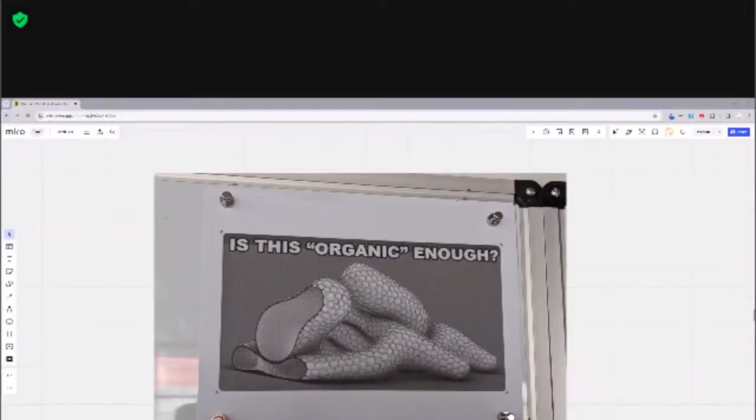The title of this talk, "Is This Organic Enough?" is a phrase I borrowed from a Grasshopper tutorial by Gediminas Kirdeikis, which I've no doubt mispronounced. But I actually printed out, let me share my screen real quick. Here we are. So I actually printed this out and posted it on my dry erase board at work. It's a funny, subtle jab at the pursuit of the organic for the sake of organic. In architecture, the ego of who can make the most globular blob. But it's also a challenge both in design and fabrication.

Imagining organic forms is one thing. We see them all the time in nature. So we don't have to think too hard. We can just look up at the sky and see clouds. Visualizing them, be it by sketching or 3D modeling, is another level, slightly more challenging. But the physical realization of these intentional, digitally planned organic forms at any scale beyond 3D printing is often an incredible feat.

That challenge in design and fabrication has pulled me through the years from an entirely analog existence to my current digital obsession. I began my career as a carpenter in the custom door and cabinetry industry, which is a little boring. And initially, I got by just fine with high school level geometry and doodling on scraps of wood. In traditional fabrication, right angles are typically the right angle and straight lines are great lines. It makes sense that we live in boxes and get buried in boxes because those are efficient forms, potentially boring forms, but efficient. You can make them on any table saw or miter saw, etc.

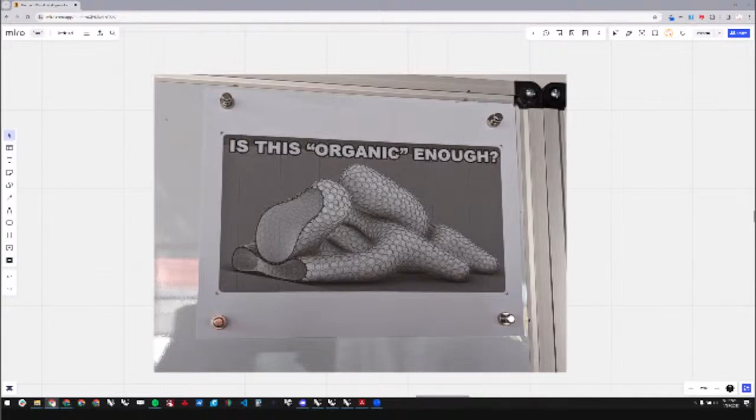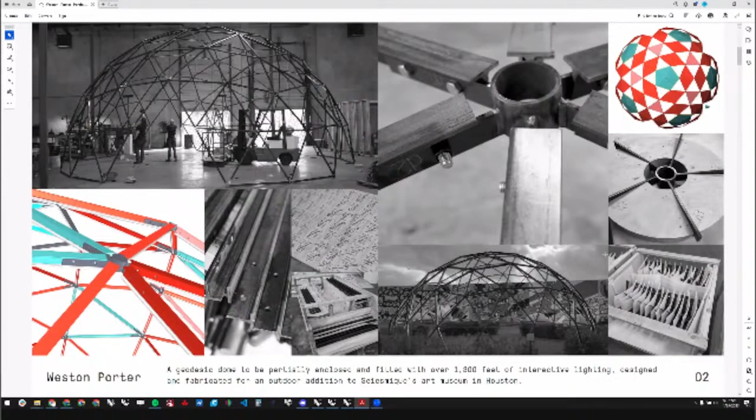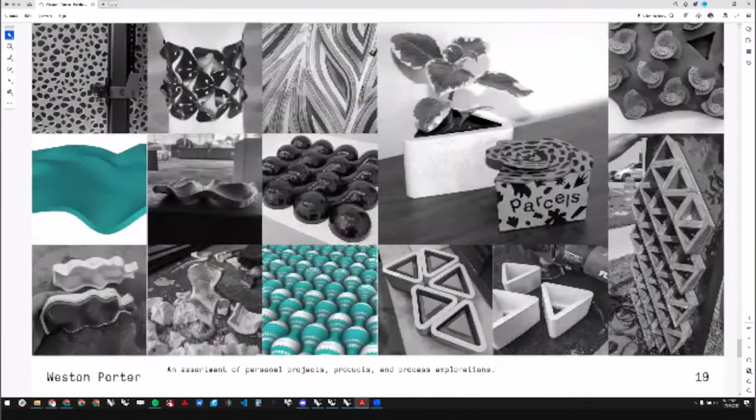And some of these projects I'll be going into detail into the guts, the files of these, but I can scroll through a few. The fun domes are at the top, but a lot of scenic things, museum experience, anything and everything that I have been able to create over the years. Let me scroll back up to something relevant.

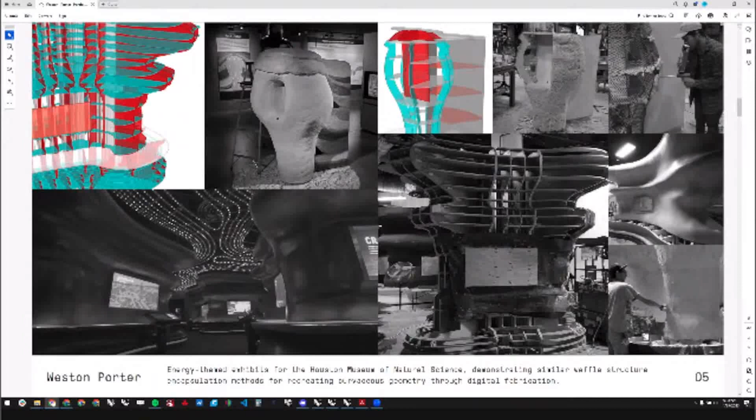Right. So making unusual shapes like these, surfaces, structures, necessitates continuously innovating with traditional fabrication, exploring uncommon materials, learning new software, programming, and embracing robotics. After a career in fabrication, the yearning for more organic projects led me to college for formal design education and ultimately to the Master of Parametric Design at Barcelona Tech, the MPDA, where I specialized in Grasshopper. Again, the tool I'll be demonstrating for you today.

I think I have a slide in here somewhere from some of these projects. A couple of pavilions that we did. Yeah, this program was primarily about learning Grasshopper, but we did it in the very fascinating way of examining domes and pavilions.

One second, please. One second, technical difficulty. Okay, all right, where was I?

Right, so before I get into the technical side of things, let me ask, what is organic anyways? Formally speaking, it's probably in the eye of the beholder, but generally I'd argue that it evolves with technology. I have accompanying photos for these. So this is a book from 1941 from the MoMA. It has an interesting description of organic design.

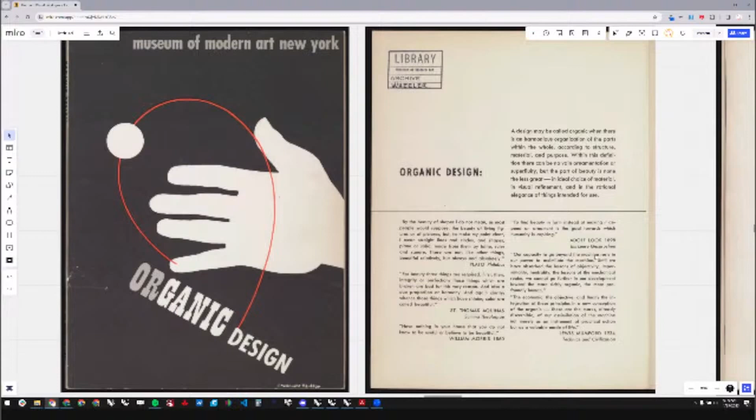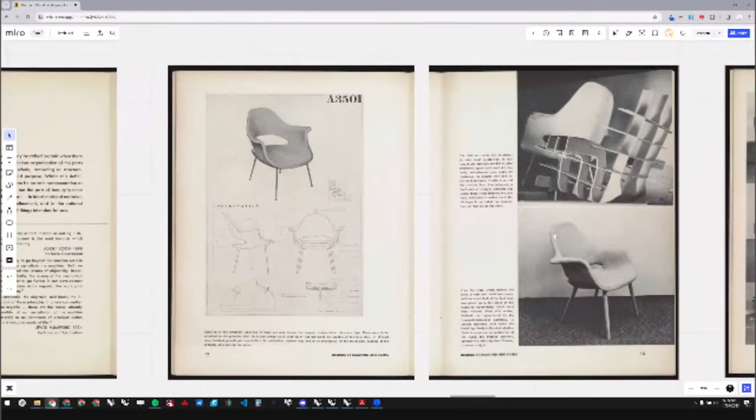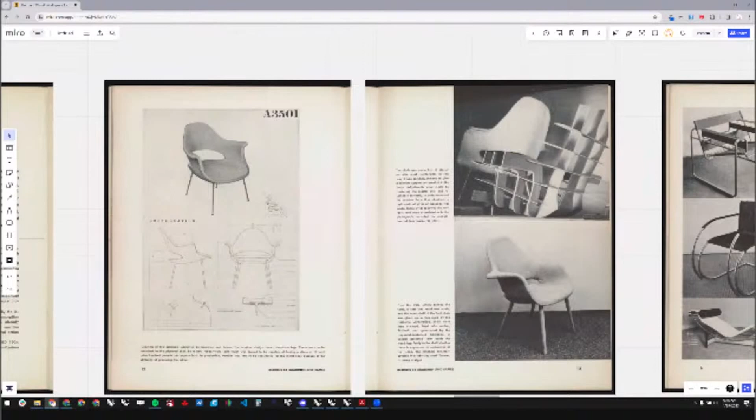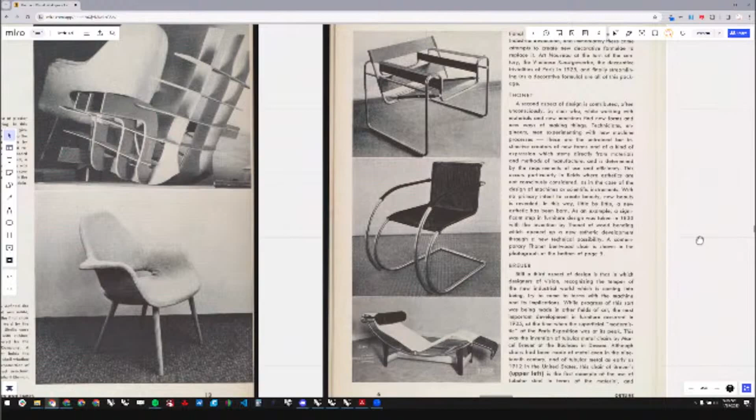And in this time, pretty much any deviation from straight lines and right angles was considered organic. The double curvature of the Eames chair, which was an innovation in steam bending perpetuated by the wartime industry, blew people's minds. This little bit of double curvature right here. Likewise, new industrial tube bending technology gave birth to Marcel Breuer and Mies van der Rohe's chairs, precedents in furniture design that continue today.

The point that I'm trying to make is technical capability often drives creativity. It either limits creativity or it enables creativity, which is the crux of design. And today, with digital fabrication, rapid prototyping, batch manufacturing, and incredible new materials, that is a high bar for any creative to well and truly exploit. Computational design is part of that answer.

It's the peanut butter to digital fabrication's jelly, the yin to its yang, and through both you can push the limits of what can be digitally conceptualized and then what can actually be physically created. You need a plan for that though, and how to realize that. I'm going to go through a few of mine today.

For my personal ideology as to what organic is, I'm there with the mid-century furniture. Working in organic on a large scale requires quite the investment. Typically, I'll take whatever double curvature or undulation I can get, anything in the pursuit of asymmetry. Asymmetry is often an expensive luxury, but I will get into that momentarily.

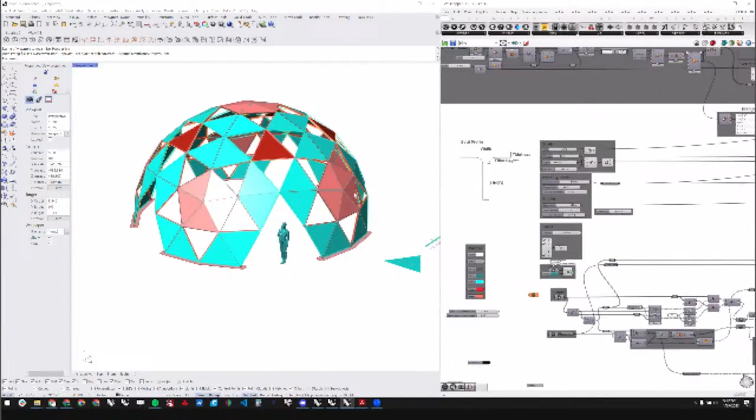So, talking about these organic shapes, I'm going to focus on domes. Let me begin with a geodesic dome. So geodesic domes, while they are faceted, are examples of double curvature, of discrete translations of spheres. Let me turn off a few things here. So let me get you a little accustomed with the interface here.

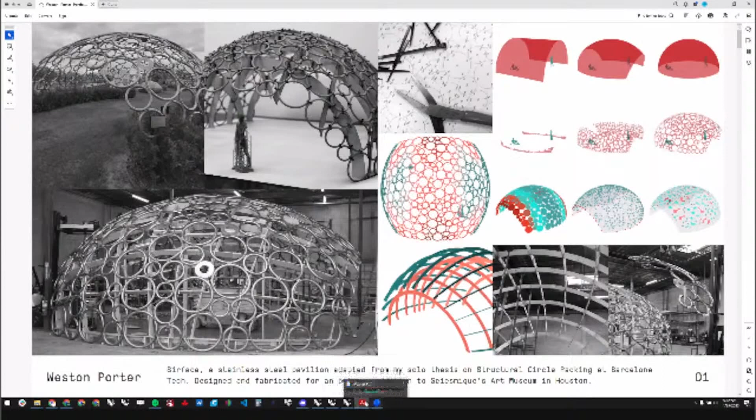So this is Grasshopper, a plugin for Rhino, Rhino being a 3D modeling software. And for the case of these initial three pavilions, curved domes, this is what I'll be using. And it's somewhat of a flex because in each one of these three files, there was no base geometry involved. So we're generating the shape and then we're generating the parts and plans off of that shape.

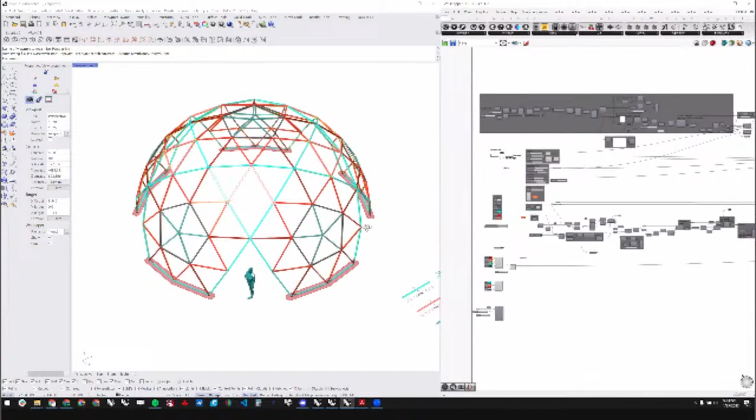So I wanted to talk about symmetry and asymmetry first, and the geodesic dome is a perfect place to begin with that. So here in the beginning, we're focused on the form finding. So that would be the size of the dome and the frequency, being the number of these triangular panels that break it up.

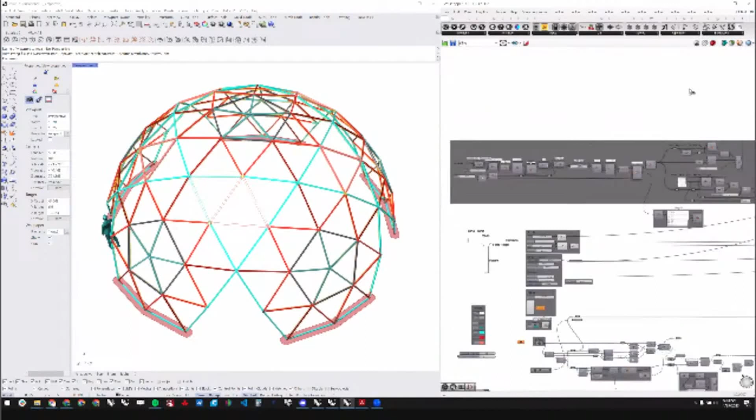Within this geometry, you have the freedom to change the size of this, increase the size or shrink it, or add more frequency. And the rest of the script adapts to build that and ends up spitting out everything you need to actually physically create it.

The interesting thing about the geodesic domes is there is a lot of symmetry. There's a lot of symmetry here, so you have a lot of repetitive parts. So if I scroll out here, go into overhead mode, you see these are the unique struts.

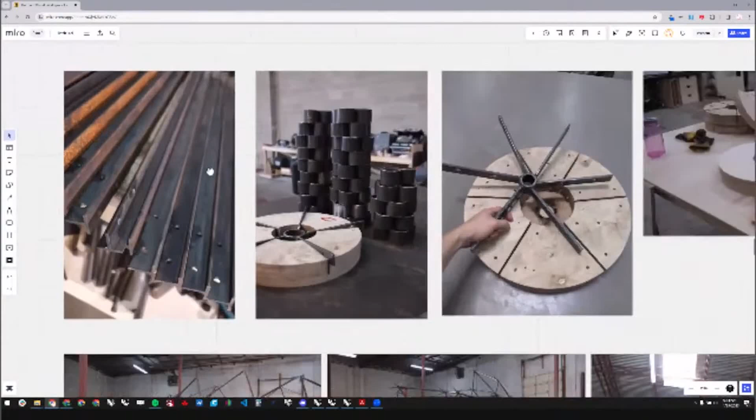In the case of this geodesic dome, rather than buying a dome kit like a reasonable person would be doing, we built it from scratch. The material on this was very structural. It was this steel T-bar channel, and these were the unique links, here labeled different colors as S0, S1, S2, and so on. And then next to it, the dimensions.

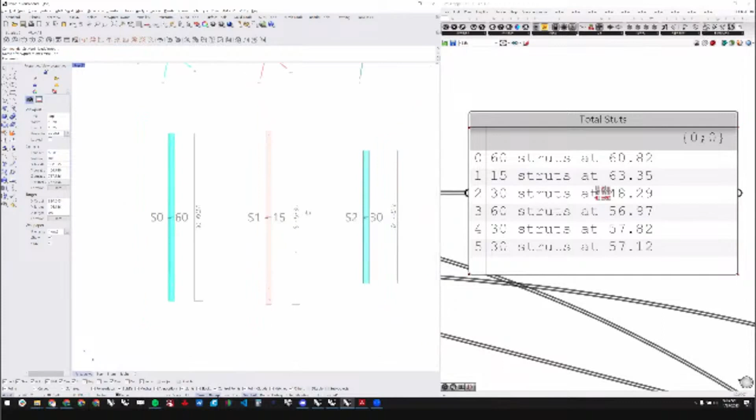I'm sorry, everything here is in inches. But we do have some decimal places here. So 63.35 is a difficult thing to give someone with a tape measure. 56.97, you can round down, but with structures like these, any small deviations or lack of tolerance can cascade and throw everything all out of whack.

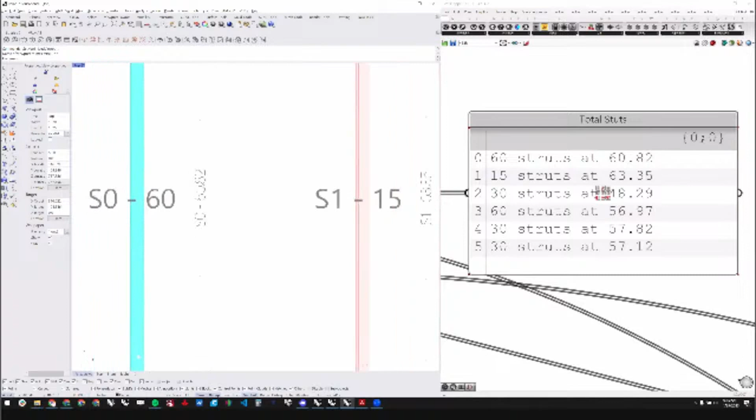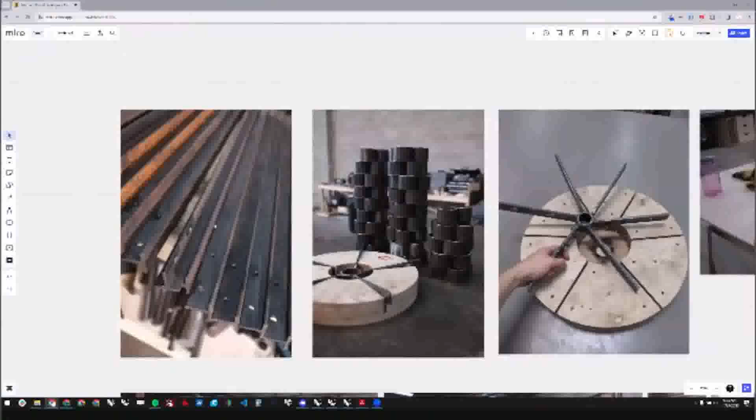And this is a discussion about design for fabrication. So let me start there. These pieces you see, these 2D curves, these are CNC ready files, and these are labels for these files. So in this case, we CNC routed out these long sticks to test the fit on the pieces as they come off of the metal bandsaw.

Coming upwards, we also have 1, 2, 3, 4, 5, 6, 7, 8, 9 different hubs. Each one of these nodes has to be a very specific angle. Luckily, we didn't have to make too many of them, but being able to create these and retain this accuracy is, again, really important for tolerances.

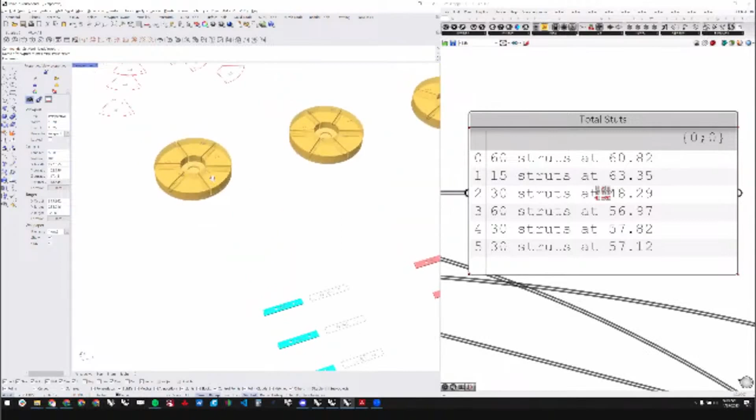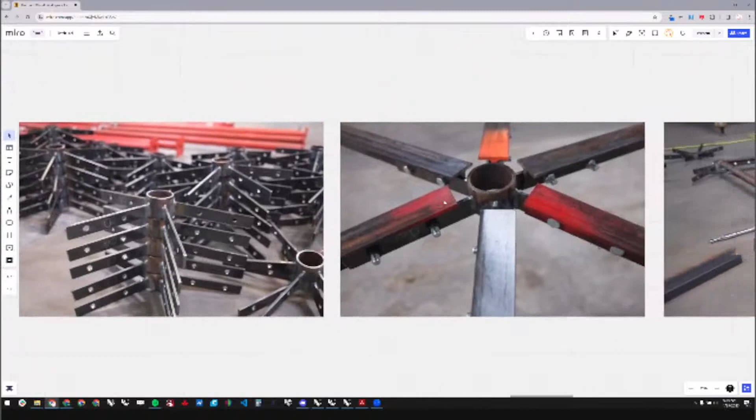In this script, the hubs are being created as 3D models, but then we're breaking apart the individual pieces and labeling them for the different fins and flanges for the hubs, as well as these CNC routed jigs, which you can see in this photo right here, have some laser cut inserts to line everything up to be welded at the exact dimensions needed to bolt together with the T-bar. So in this case, the script also includes the CNC routed files for these with pockets and labels and the laser cut pieces.

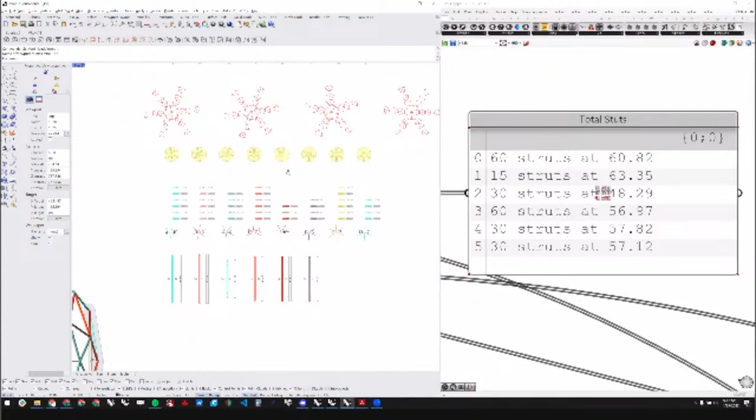Now, this is a pretty easy system. We don't have that many parts. We could basically just look at the map of these pieces, color coordinate it to the pieces and build this. Honestly, geodesic domes are straightforward enough that you wouldn't necessarily need any of this at all. You could just take the lengths and do a little math and figure it out yourself. But the way I built this script is that I built it for asymmetry.

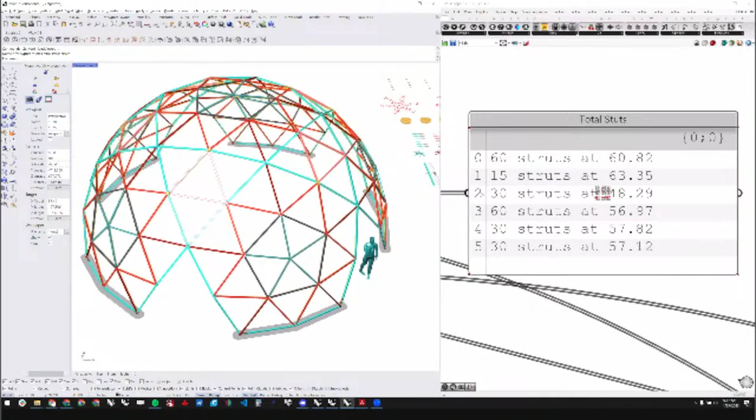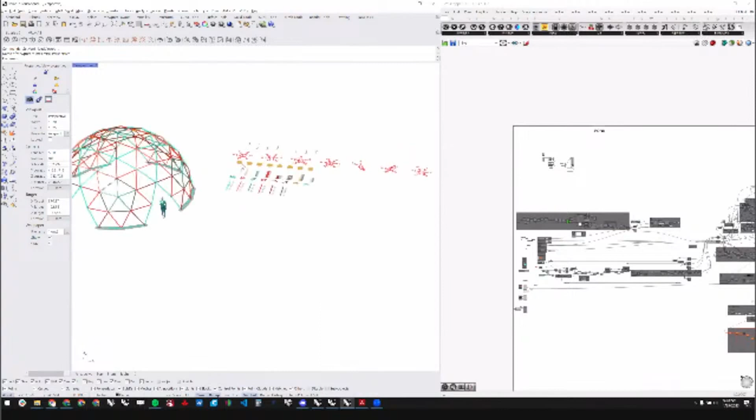So if I were to take this initial dome geometry and skew it, squish it, scale it unproportionally, if I were to take some of these vertexes and push and pull them in different ways, then after my computer thinks for a long time and potentially crashes, it would recompute everything here. So instead of these 7 or 8 different jigs, this little yellow line would go off into near infinity. And at that point, it's a risk versus reward. This is where asymmetry gets really expensive.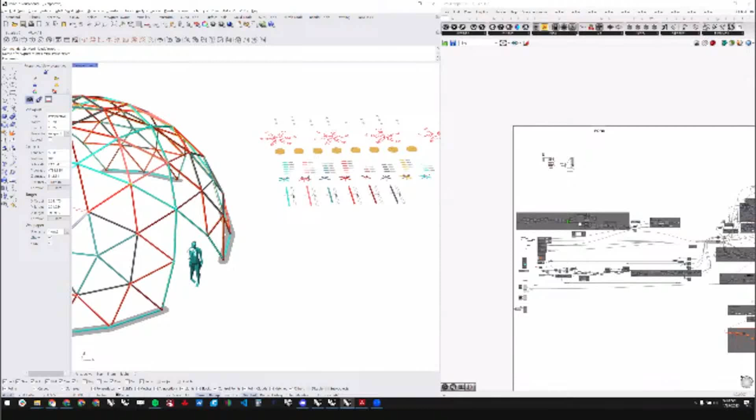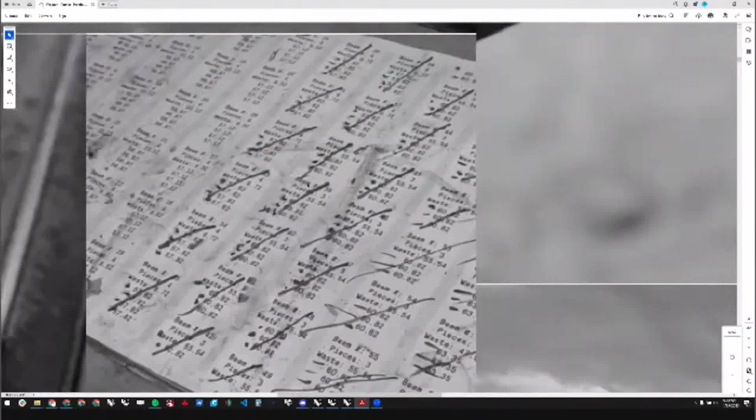You can make things that are less symmetrical, but then you're looking at potentially each and every one of the parts being entirely unique. But that's not necessarily a problem. That's a problem of the organic in general. As long as you have a system in place for managing this, then it's not an insurmountable task. A part of what this script does is gives you the cut list for linear nesting.

So, if you have someone at a station just working a metal bandsaw all day on these 20-foot long lengths, then they would have a map of how long to measure each one and cut it. They would have these story sticks, the plywood sticks, to be able to measure that. The hole placement is standardized, and someone could potentially just assemble these jigs all day long, gather up the plasma cut engraved pieces, and in this regard, you could build pretty much any shape you want, within reason. Torsion and twisting are another issue, but I can reference that on another piece.

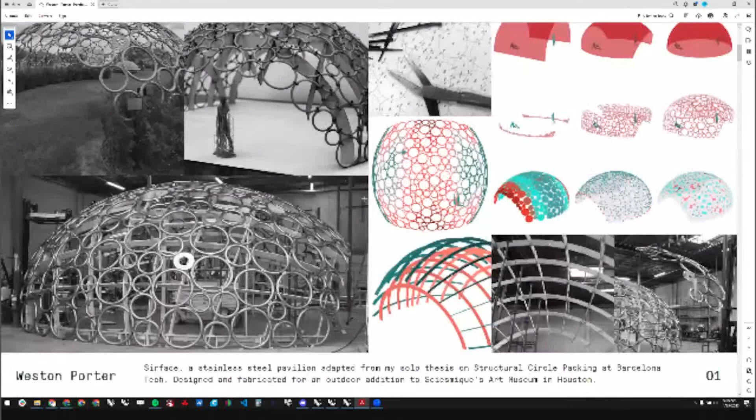So the next one I'd like to jump into is this circle packing dome, which gets slightly more asymmetrical. So in this dome, to the photos here real quick.

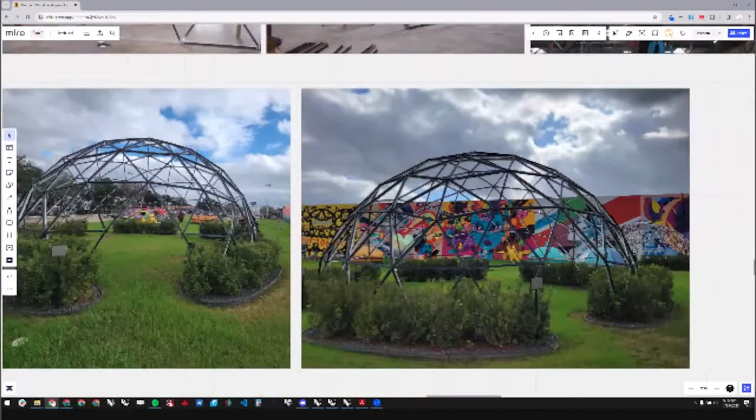I'll walk you through the process a little bit. All right, so here is the geodesic. Everything came together really well, as you expect with the geodesic math. And this thing was ridiculously strong, stronger than it needed to be. This was the initial installation outside, but it'll eventually be enclosed.

So the circle dome surface, as I like to call it, was my thesis project, my solo thesis project at MPDA. And I had the luck of being able to build it at the same time, or shortly after I graduated. This is the aforementioned geodesic in the back here.

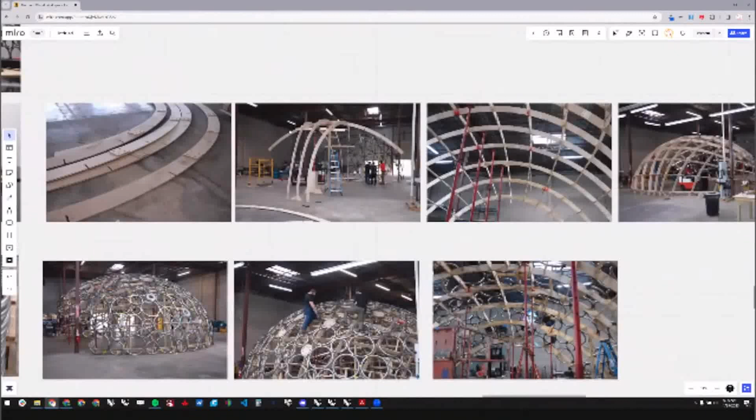And I was doing that project for a sculpture park in Houston, and I was kind of able to upsell a 2-for-1 dome special. This one being a lot more theoretical and experimental and nerve-wracking to create, but it turned out all right. So before I jump into the script, I'll briefly outline the direction here.

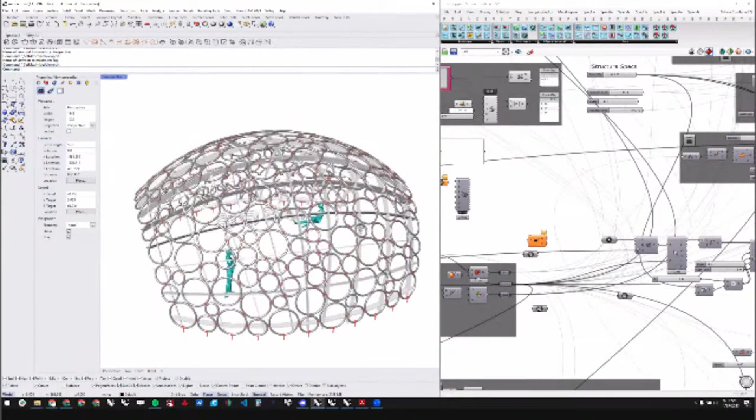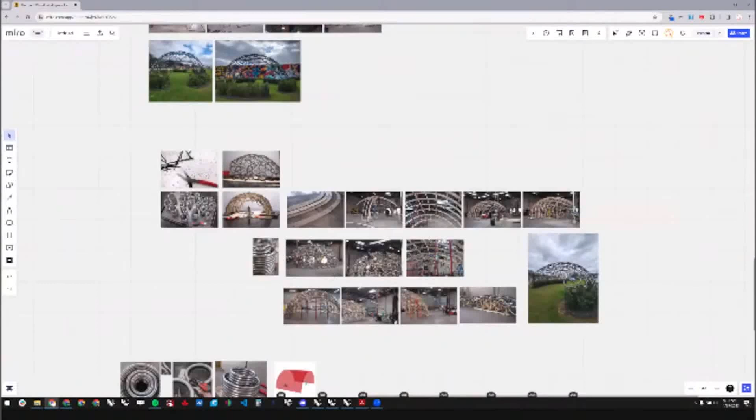So the idea of the dome is circle packing, but circle packing in a structural way. Circle packing is something that you can think of in terms of soap bubbles in the sink, kind of like jostling back and forth for the right position. And that's largely how this was generated. I think I'll take a second to load some of these animations.

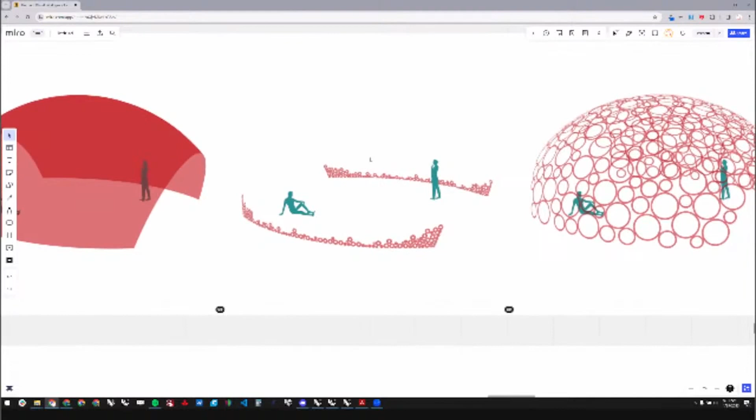But it was the idea of generating the surface, capturing the surface somewhere between a plane and a dome, generating the circle pattern somewhat randomly onto this dome. I'll have to come back when these are loaded a little bit better. And then optimizing the pattern to be the most structural.

The difficulty here was that we're using these steel rings, and the diameters of these steel rings. I've actually got one here, one of the smallest ones, signed by the crew that helped me put it together. But the issue is that each one of these rings couldn't be its own custom size. It needed to be a specific diameter. In this case, I used 3 different diameters.

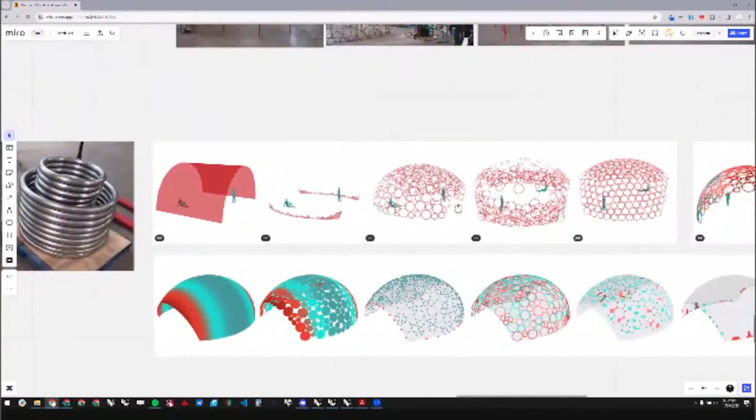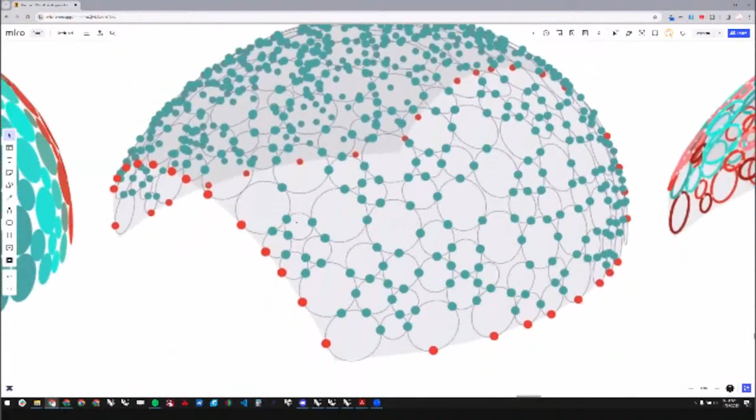So the computational method had to do with how we're going to fill this space in a structural way to make sure that all of these rings are connecting to their tangential neighbors with enough pieces. Typically, these all have 4 connections each, and considering the outside edge.

In this system, I got to explore several different ways of generating these, but the most effective way was through just generating these forms, these patterns randomly, and then coming back and examining what was right about them, what was wrong about them, and then regenerating them.

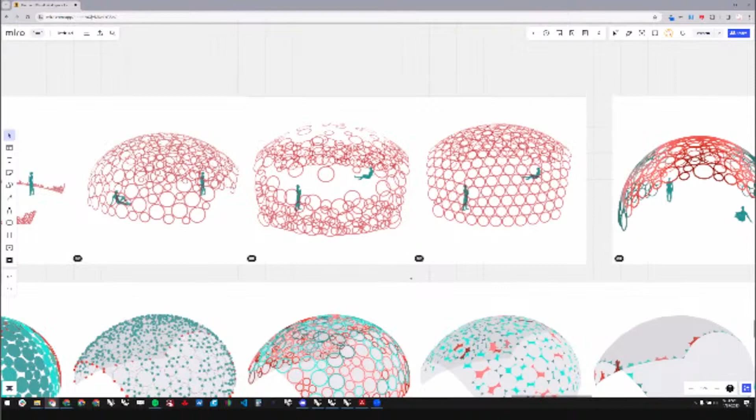In Grasshopper, the specific tools for this were Kangaroo, which is a physics simulation generator, and Octopus, which is a multi-objective solver. It allows you to create a circular process of generation, optimization, and regeneration. Some of the example metrics that I use for this are measuring the surface,

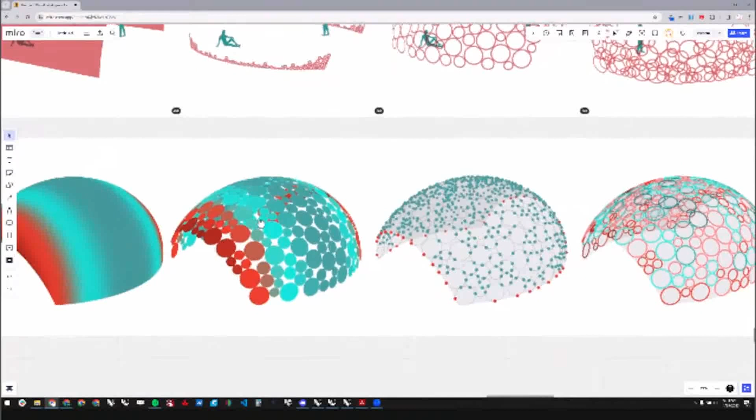curvature, visualizing the circles of any given pattern for the planar nature of these rings over curvature. So in areas like this in the turquoise, it's easier to maintain the curvature. In other areas like this in the red, it gets a little bit harder because you're starting to deal with these flat planes.

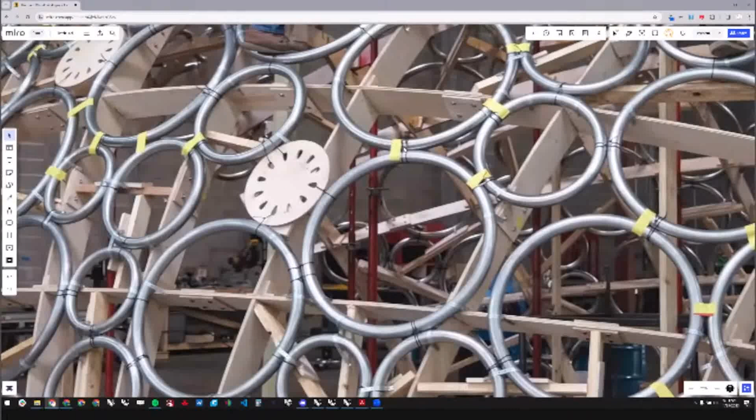Again, measuring the quantity of these tangential connections, the way that the ring dome was temporarily anchored, but then ultimately welded together. You can see these little butterfly connections here. And... lost myself.

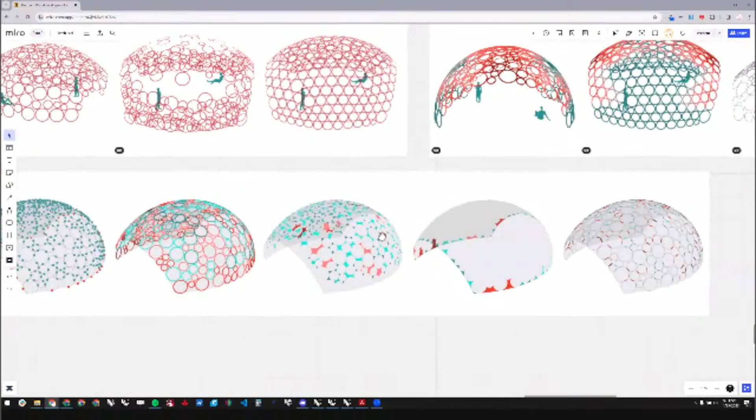And trying to predict for aesthetic issues. Unsightly gaps in areas may not be a structural issue, but might be an aesthetic issue along the edge as well. And then the closeness of these rings, which helps to estimate how difficult some connections would be.

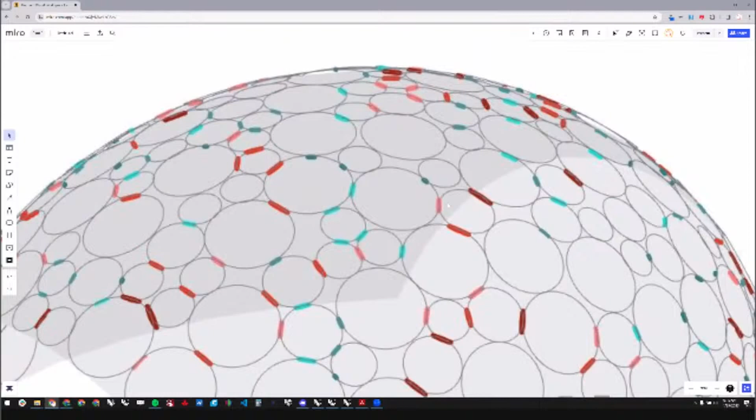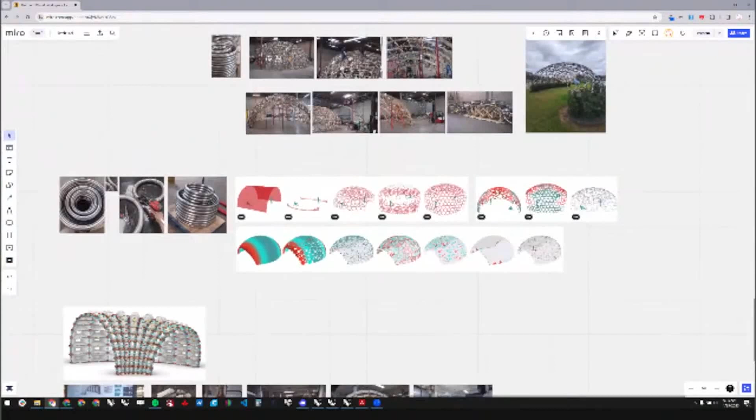Ideally, everything should maybe almost touch with these rings, but definitely not overlap, because then this ring is jostling another ring out of its place, and very quickly that will cascade around and cause a lot of difficulty. So by optimizing how these were generated, I was able to create a map, essentially, of which rings are being used where and their angles to each other.

Initially, I 3D printed these rings and then created a model off of them. The first model I created was very lumpy, as you can see, and I determined that I would need to have an internal substructure, temporary plywood substructure, to make that happen. So walking through that process a little bit, I'll speed up a little bit because I'm behind on time,

but we created the simple radial waffle structure to support everything, anchored and reinforced that, and then according to the original map, started laying out the different rings, temporarily just zip tying them, connecting them together, and eventually welding each of these together. In some cases, I ran short of rings and we had to factor in some plasma cut pieces, but overall, the map held very true until the very top here.

Here's the finished dome in the warehouse, and we left seams in very strategic places so the different panels could be pulled apart, stored, and then ultimately reassembled on site.

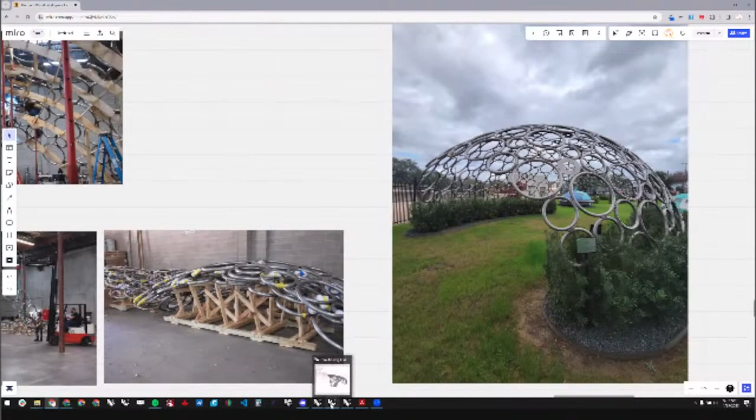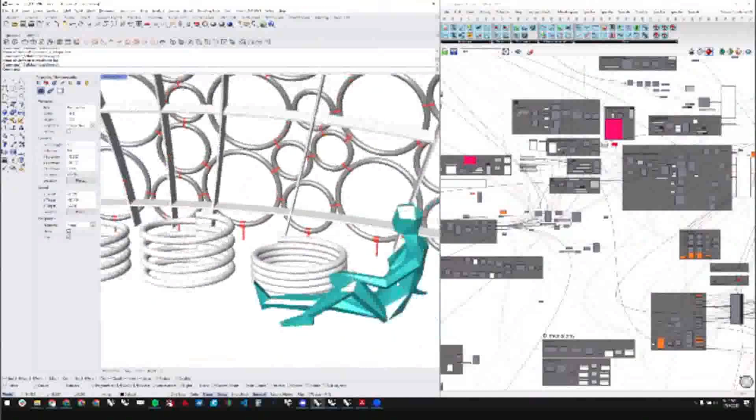So again, on the idea of adaptation, here's the model for the ring dome, one of three files. This was the process by which the rings were rolled into stacks, then cut, bent back together, and welded in place.

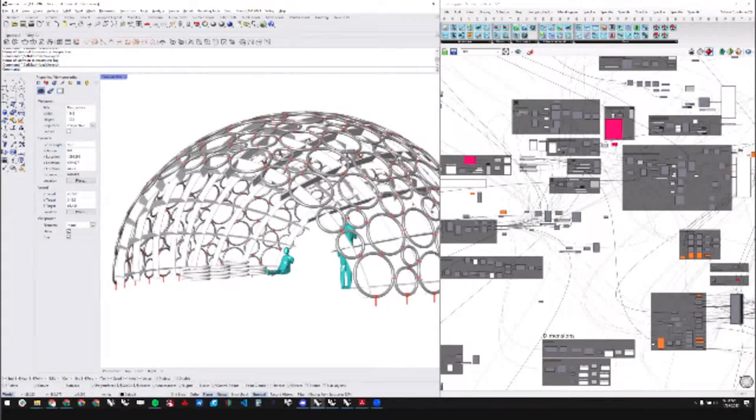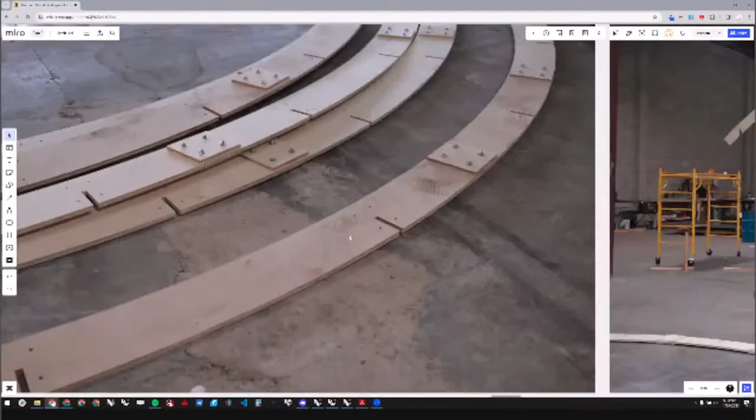But again, just like the geodesic dome, it's the idea of adaptability and using as many like parts as possible. The radial waffle structure, each one of those pieces was definitely unique. By the way, plywood at this length becomes like noodles, essentially, but it was manageable. Each piece was generated and labeled. Everything slid together appropriately, with notches generated at the right angles to allow everything to come together.

I chose this shape somewhat cautiously because it was more dome-like, and the more dome-like you are, the more confidence you can have that it won't fall over on you. Egg shapes, hemispheres, domes are just naturally very strong forms.

But the repetition of pieces, namely these circles, and the plan for how they are brought together and communicated to those assembling it, was a key feature for capturing this organic double curvature and slight asymmetry in the way that the dome spreads open.

So that was kind of a precursor to coming to the third - I wouldn't call this a dome, but perhaps a pavilion we have here, which is a prototype I made for a company called Volvax in New York. This represents pushing the idea of asymmetry a little bit further.

This was based on conical research, something that one of my professors at MPDA, Xavier Teller, specialized in, and myself and Danny, another one of my fellow alum, really threw ourselves into. I essentially had both of their assistance helping build this, so I don't want to take all the credit.

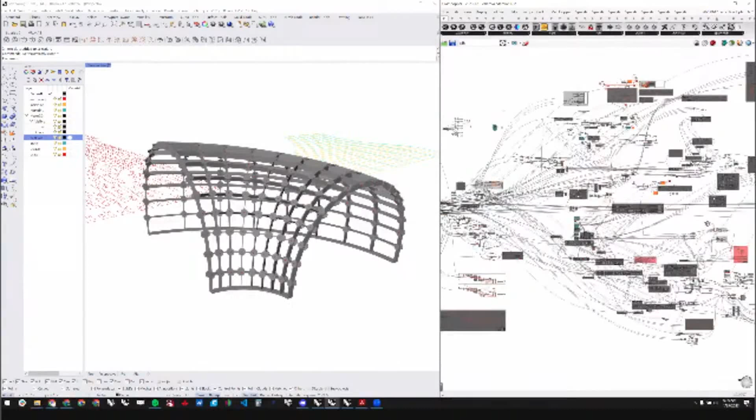But the key part with this piece is really the data management. Once you have something organic and potentially asymmetrical, every single piece is unique, and it can be difficult to manage all of those. This script here is about maybe 5,000 components. It's hard to show it all - it looks like a mess, just like any script this size could. But there are some unique features I just wanted to demonstrate, overall discussing these concepts and how they can make making organic things a little easier.

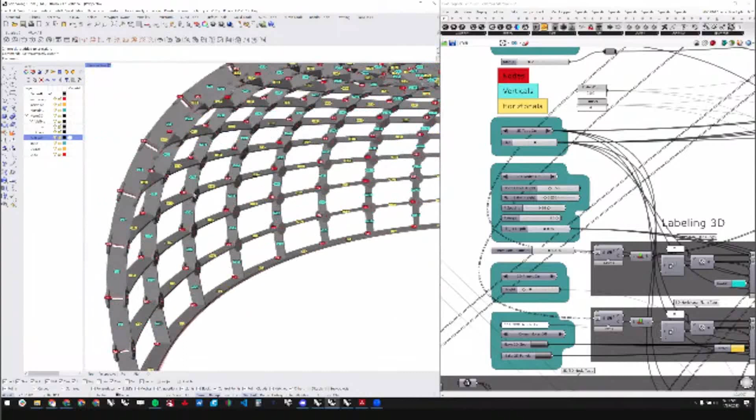First off, I would say part labeling is foremost, so I'm going to turn these 3D tags on. With every single piece on the structure being entirely unique, it was very important to give each one its own personal label. So this node right here is DR, this vertical strut is V71, this one is H147. And I have the visual map here of how everything comes together.

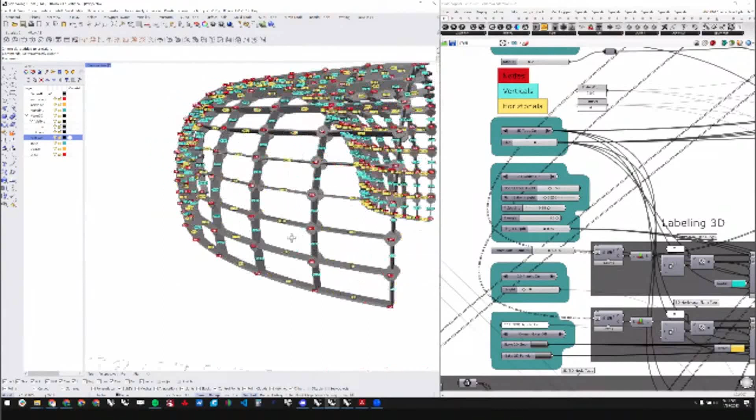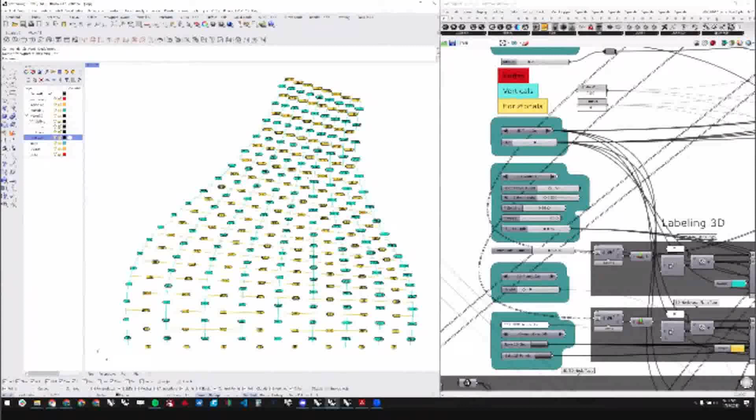Additionally, I have the flattened out view of what this shape would look like, again with all of the horizontals labeled. I have the nodes turned off here as well, but you would see those too. I did design this in a way to be a little more intuitive for the assembly. That's the second large thing with working with unique parts like these - how to label them and then how to bring them together.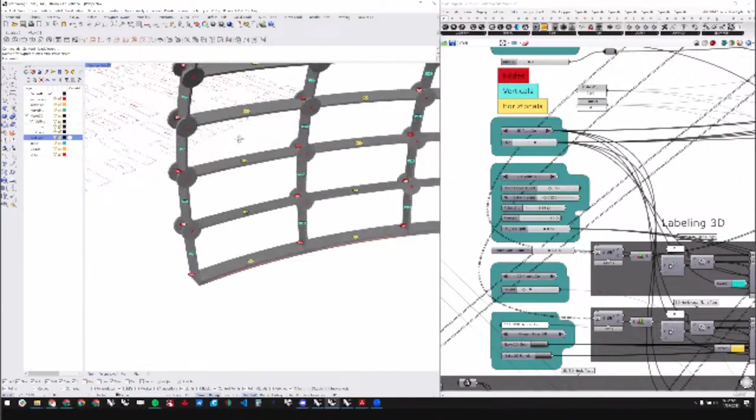It's the parts and the plans that bring it together, so there is a little bit of a rhyme and reason for this. The nodes start with AA, AB, AC, BA, BB, BC, and then you have horizontal 1, 2, 3, 4, and vertical 0, 1, 2, 3, 4. So if you did start on the corner of this piece, you could work your way all the way around, over this arc, just following this map.

These labels are translated to the parts as they are in 3D space, and then brought down to the 2D plane with the appropriate notches and with all of the labels. So the label of the piece itself in the middle, and then which one of the nodes to the left or right that it connected to. Likewise with the nodes, the name of the node here, and then the name of the connection that it links into nearby.

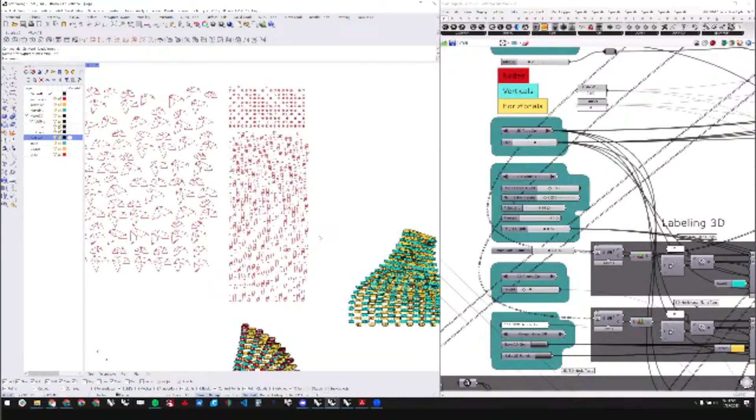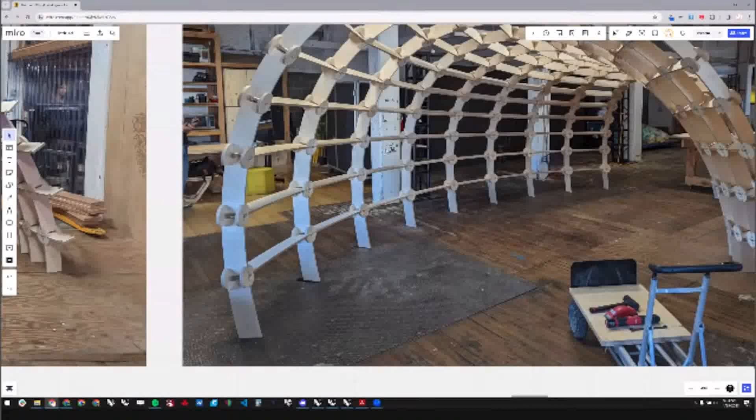This brings me to the third issue with dealing with this many pieces - it can ultimately become a puzzle. This structure was relatively small, but it was a prototype for what could be a much larger, much longer, much wider piece, or even a smaller piece but with smaller quads, so it was heavier and more structural. But if you end up just cutting all these pieces, then you suddenly have a puzzle to deal with.

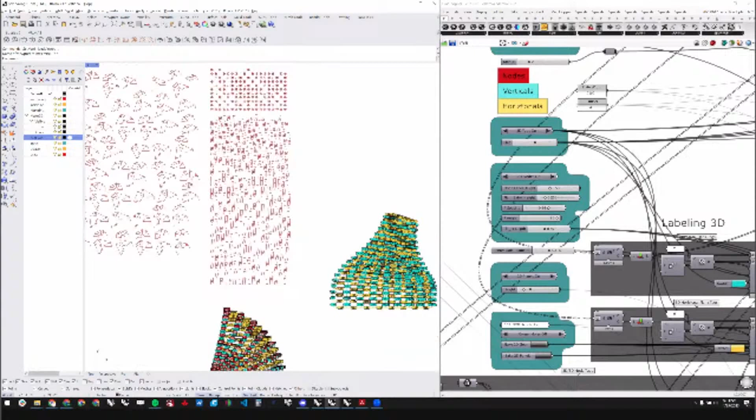And say you miscut one of these pieces, or you lost one of these pieces, or it's damaged on the CNC router, you would also have a puzzle to be able to go through and find the exact part you needed. So managing the order in which these are cut, the order in which they're nested on sheets, and the way in which you can find what you specifically need is also an important thing.

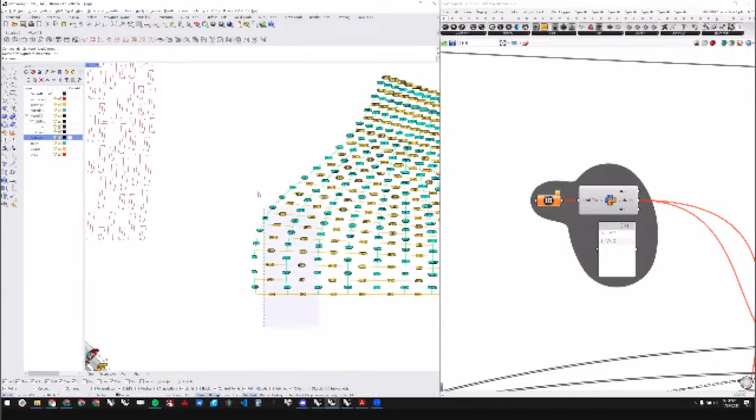That is something I addressed here with a node finder. So the map here, if I wanted to pick an individual piece, I can set it in here, and then it will show me exactly where it is. Likewise, I could grab a whole section and drop them there. Let me clear this off real quick.

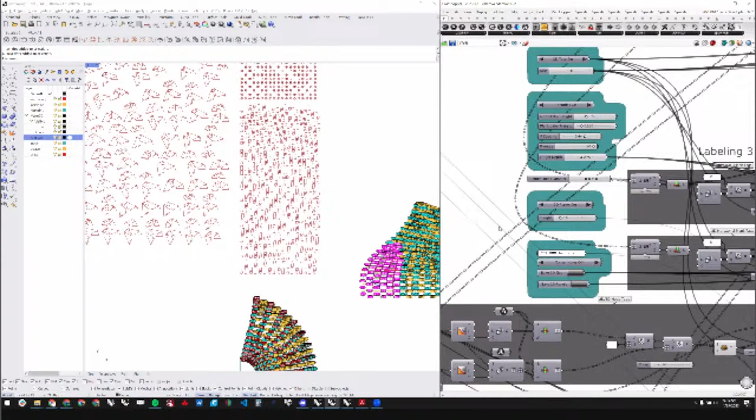This helps manage the data, and it's also helpful to use the software to prepare for the actual digital fabrication, which is the one thing I haven't really gotten into as much, focusing on the digital side, but it's through digital fabrication that all these structures are possible. And it can be tedious, again, with this many pieces if you don't have a plan for that.

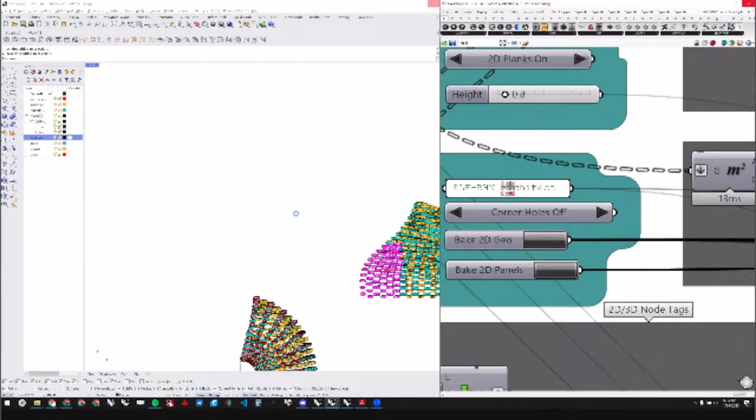So if I turn this off and bake all these pieces, it'll take a moment. If I bake all these pieces, then everything is in its specific layer for how it's going to be cut, and the labels are included, likewise for these.

There are ways in which CNC CAM software, the software that translates the parts into files for cutting, can be... it can be tedious if you don't properly communicate that, and it's even more tedious if you have to go through and click on every single piece within that software.

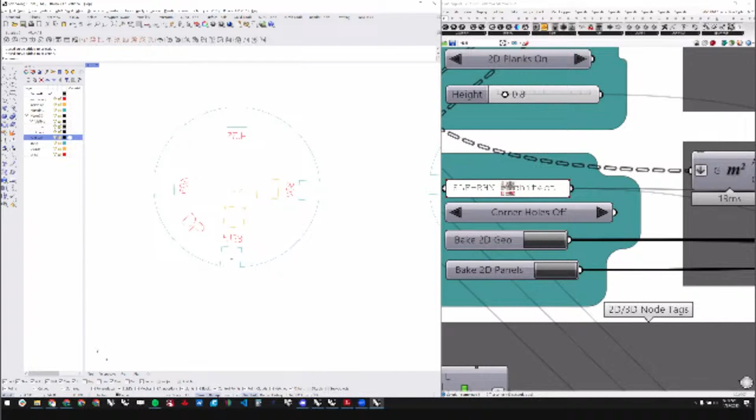So being able to break things out and recognize them as internal holes, that don't necessarily need any tabs to hold the piece down, or external pieces that do need little tabs around the edges. When and where the inside of these corners can get the little dog bone, with a rounded bit, you can't always get right into a corner. These are really important things to examine.

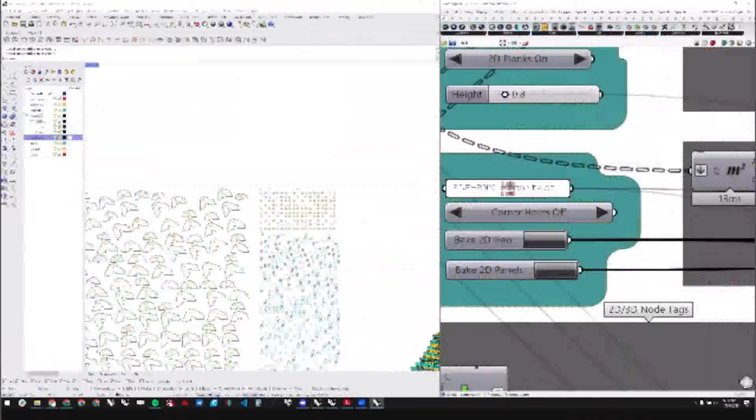Likewise, with this particular piece, we explored several different approaches.

Weston, sorry to interrupt you. Yes. We have like 3 minutes, maybe. Okay, maybe 8 if you want, but please. Okay, thank you, Danny, I'll wrap up real quick.

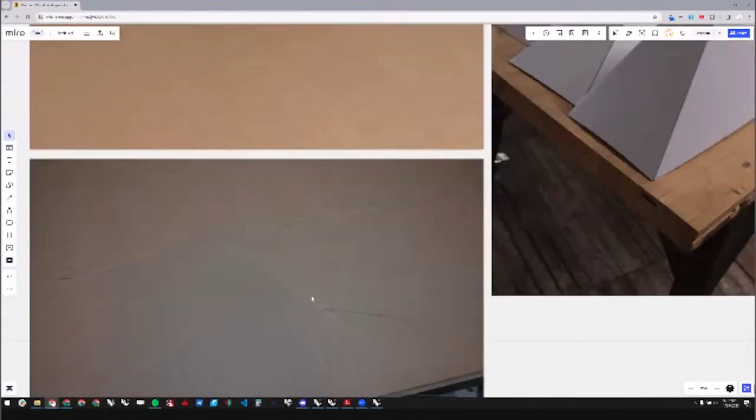But just the minor thing, the last thing I want to mention about these cones that we made was, again, prototyping a system, perhaps visualizing these as bent aluminum, but likewise in the file it is generating all of the different cone shapes, as well as the tool paths by which these are creased along different angles and ultimately cut.

So let me wrap up. I could just geek out on the software data structures all day, but let me turn these 3D nodes off.

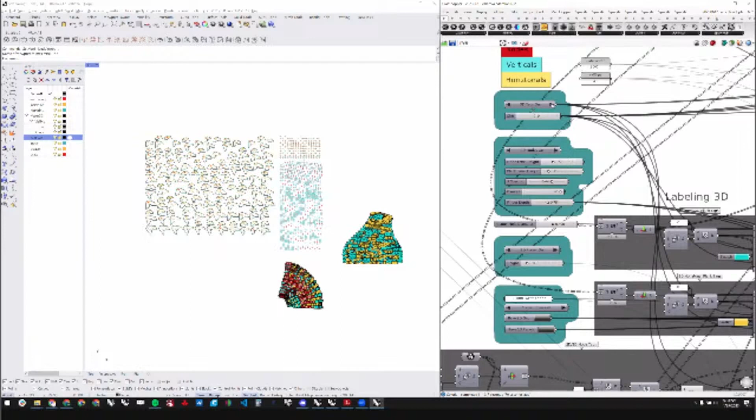So again, with these, just to summarize, with these 3 domes, they kind of represent my personal journey into exploring the organic, exploring this double curvature, but pushing the limits of how organic and alien and globular things can be, while still being fabricatable as we go. So I'm hoping as my career progresses, the shapes can get more wild, and there can be more pieces, but I'll always have systems for how these can be managed for fabrication.

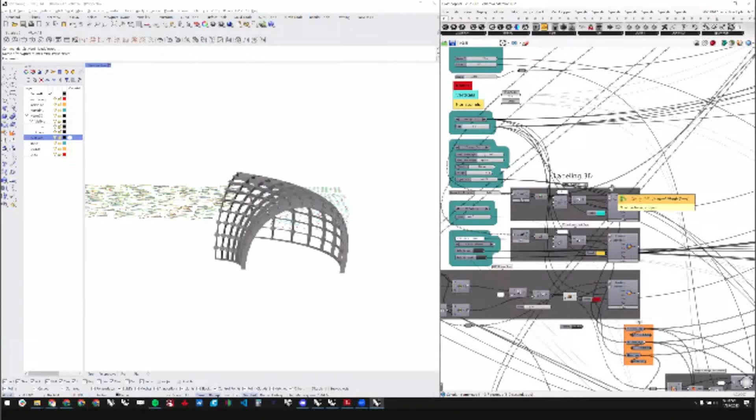Let me see if I missed anything here. I think that about covers it. Are there any questions?

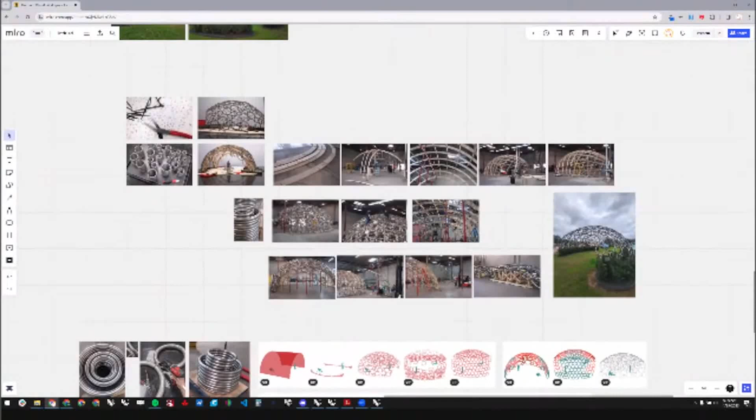I have a question about your actual job at Anicka Yi Studio. I think it's very interesting, the philosophy of your work. What do you think, can you relate digital fabrication and parametric design with the philosophy of the dichotomy between nature and robots? How do you see that? What do you think?